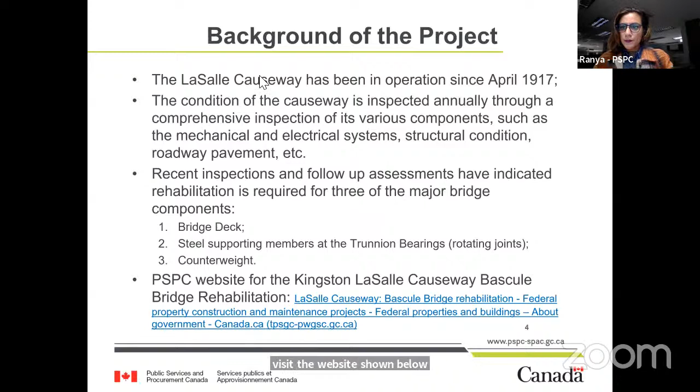Thank you, Ranya. My name is Robert Jacques, and I'm the project manager for the Bascule Bridge Rehabilitation Project. As Ranya was describing, the goal of the project is to address the condition of the Bascule Bridge through rehabilitation, namely the three main components that she described.

We're looking at an in-kind replacement of the steel deck grating and supporting steel members, which you can see pictured in the bottom left photo. And then we need to do steel rehabilitation of the main trunnions. A trunnion essentially acts as the pivot point for the lift bridge. If you imagine the bridge like a shoe, it lifts at the heel - the two pivot points, the trunnions, are located at the heel.

The counterweight, the third component scheduled for rehabilitation, provides the balancing for the bridge and enables it to lift for marine traffic. The counterweight is pictured in the bottom right here. You can see there's an interim repair currently in place - we've installed some steel cable and netting. However, that's a very temporary measure, and a more developed approach needs to be taken in order to carry out a full rehabilitation of the counterweight.

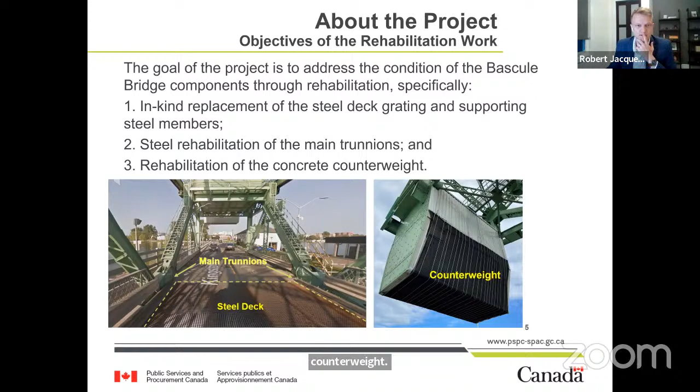Pictured here we have the steel deck grating I was describing, and you can also see some of the supporting steel members underneath that are in need of rehabilitation and replacement. The steel deck grating is approaching the end of its service life. The surface of the grating has serrations that provide the needed grip for vehicles and motorists on the roadway. Those serrations are starting to wear down, and the only feasible option for rehabilitation of that grating is replacement.

We've carried out some interim repairs as bearing bars fracture over time, but a more full replacement is required in order to address the issues we're seeing with the grating. Additionally, the stringers below deck, which run longitudinally along the deck, are approaching the end of their fatigue service life, and again the only option for the stringers is complete replacement. Some of the other components connected to the grating - the sill, and of course the timber curb - will also be removed as part of the project and replaced.

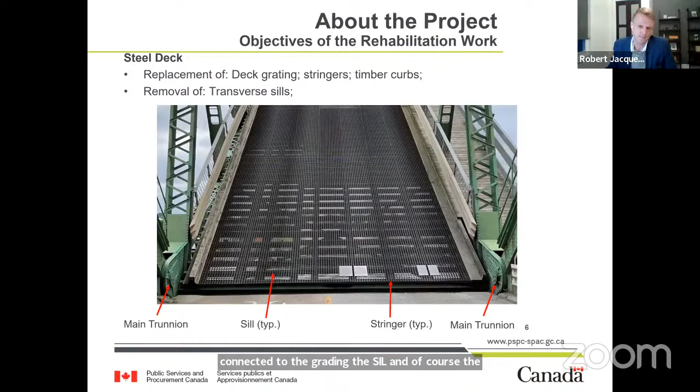Here we have an up-close picture of the trunnion. As mentioned, it's the pivot point for the bridge. In order to carry out the rehabilitation, we'll be removing some of the roadway to permit access to the exterior of the steel component. The work involves strengthening the gusset plate, which is the exterior plate on each side of the trunnion, and also doing some reinforcement of the through trusses, the connecting members to the trunnion.

In doing the steel reinforcement on the gusset plate, we will also be replacing some of those rivets you see pictured there with high strength steel bolts.

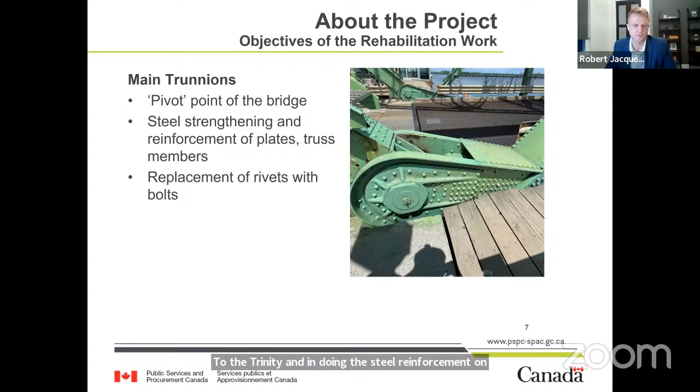Finally, we have the counterweight, and again, we have another picture presented here, which shows the counterweight's condition with the cladding removed. And you can see, as evidenced in the photo, the deterioration of the concrete has advanced.

So in order to repair the counterweight, we'll be removing the interim repair net and cables shown in the former photo, removal of that metal cladding on the exterior surface, breaking back and removing the concrete to what we'd refer to as sound concrete, concrete that's no longer cracked and deteriorated. Then installation of new steel reinforcing bars and dowels, which connects the new concrete to the surface, and then pouring of that new concrete exterior shell around the counterweight.

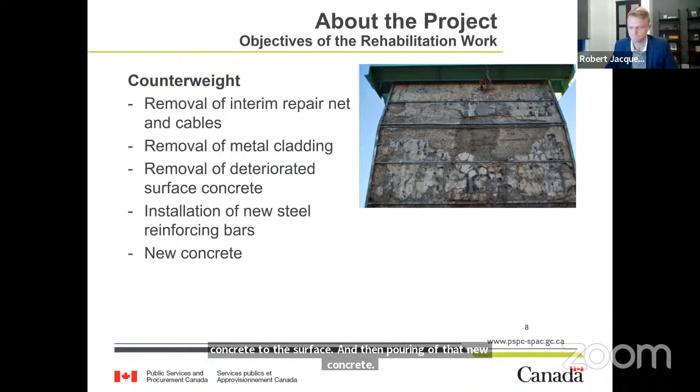So how are we proposing to carry out the scheduled works? Regarding the deck and the trunnions, we are planning to carry out the work in a three-stage approach. In the first stage, we'll look at replacing the westbound lane, so all traffic will be alternating on the south side of the bridge, the eastbound lane, and we'll establish temporary traffic signals and flaggers during rush hour to deal with queuing traffic and allow them to pass on the bridge in an alternating fashion.

Once the steel grating and stringers have been replaced on the north side of the bridge, we'll switch everything over to the north side, so traffic would be in an alternating fashion on the westbound lane. Again, we'll use the temporary traffic signals and lights to manage traffic in an alternating fashion.

Finally, we have the stage 3 removals. So the area that's been supporting that temporary traffic barrier through stage 1 and stage 2 also needs to be replaced. We'll remove that temporary traffic barrier and replace the grating and stringers along the center line of the bridge. Those replacements need to be done while the bridge is fully closed to vehicular traffic, so we're proposing to do that work during off-peak hours, overnight or over weekends, when peak traffic really dies down and it's less of an inconvenience to the public.

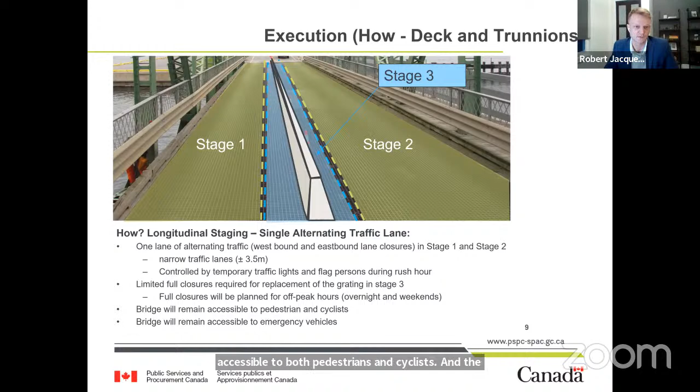Finally, we have the concrete counterweight and how we propose to complete the repairs on the exterior. The contractor will be constructing a temporary access platform, highlighted in the image here. This will allow vertical clearance to be maintained underneath the counterweight, so cars can still pass underneath, although they'll be reduced to that alternating lane for the deck and trunnion work. We expect some full closures will be required to install this access platform and then finally dismantle it once the project is complete. Those closures would be carried out over a series of either overnight weekday closures or weekend closures.

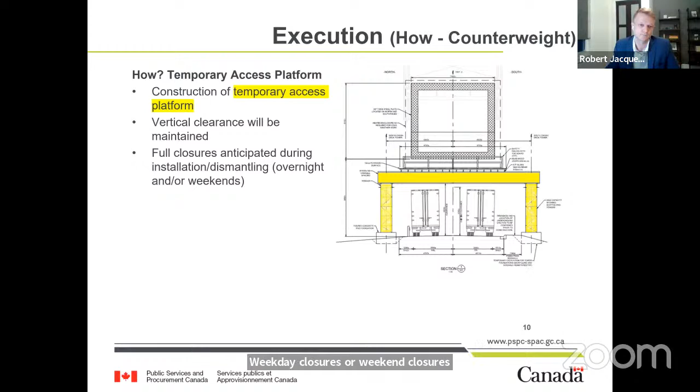The work will be completed during what is known as the navigation off season, from November 1st to April 30th, 2024, when we see a decrease in marine traffic. We're proposing during the first shutdown season, November 1st, 2023 to April 2024, to initiate the construction activities and complete a majority of the work. Any work not completed in that first shutdown season would proceed to the following year, November 1st, 2024 to April 2025. During this time, the bridge will be unable to lift for marine vessels and marine traffic.

And that's just due to the nature of the work. We're doing repairs to the concrete counterweight, and we're taking things off the bridge, including steel members. The bridge really relies on a delicate balance of weight in order to lift for marine traffic, so that just won't be possible while construction is underway.

So lane reductions are anticipated and expected, as I mentioned, for the alternating eastbound and westbound lane closures, and we expect that to be required throughout the November 1st to April 30th period. As mentioned, vehicular traffic can still utilize that alternating lane during these times.

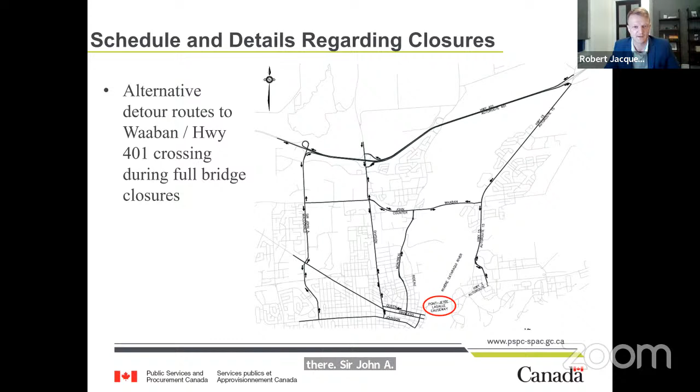Regarding how information will be shared with the public, we have a newsroom website where we post our regular public notices regarding closures. On that website, you can expect details about the planned closures, when they're happening, how long they're expected to last, and when the bridge will be reopened to full traffic.

I'll also note that any emergency public notices, for unplanned closures we haven't accounted for, should they occur during construction, we would also use the public notice process to inform the public of the closure.

Finally, we have how to contact us directly with any questions or concerns about the project. There's a website link included, which is being shared in the chat. If you go to that website, there's a form where you can submit questions or concerns. Alternatively, there's an email inbox, monitored regularly, and any questions are filtered through to the project team. Those are both options for contacting us with comments or concerns regarding the project.